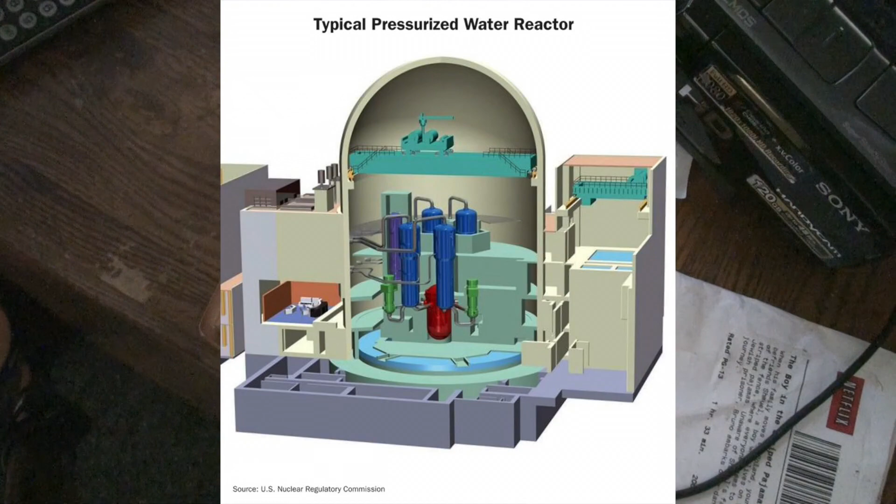So thank you for your willingness to come here to provide this to the technical staff at headquarters. Thanks, Louise. I'll turn it over to OPPD for their presentation. Good afternoon, and thank you for the opportunity to discuss the Fort Calhoun Station containment internal structure with the NRC and the public. I'm Bruce Rash, the recovery director for Fort Calhoun Station, responsible for the issues associated with the recovery of the Fort Calhoun Station. Jerry Simpkins, manager of licensing. Brian Davis will be facilitating for us—he's the recovery engineering director and responsible for this project. Bernie Van Sant is the project engineering lead. Tom Daly is the containment internal structure project manager.

Russ Plaskey is the civil structural engineer for the station. Additionally, we have hired several leading industry engineering firms to support the containment internal structure work. Stevenson and Associates has developed the finite element model for the containment internal structure, developed conceptual designs to address issues, and supporting analytical work for the operability evaluation.

Again, I'd like to introduce Dr. Sming Singh from Stevenson, Mike Allison, Doug Seymour, and Automated Engineering Services Corporation developed a GOTHIC model for the pipe break pressure loads, which are used as inputs to the finite element model. From AES, we have Eric Halverson and Andrew Carmine.

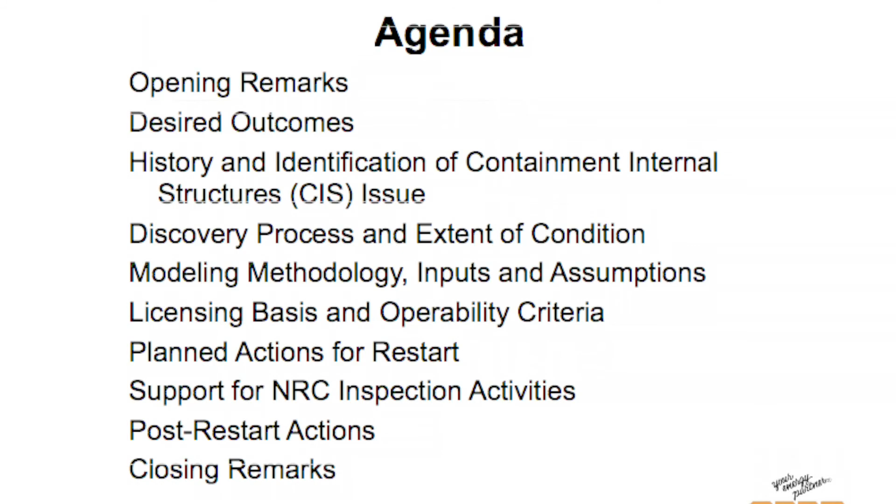Okay, let's go to slide 5. First, we understand the importance of resolving this issue, and we want safety to be paramount in our path forward. So we are committed to the safe restart of Fort Calhoun. The topic that we're presenting today is the containment internal structure. It's the structure inside the containment shell that supports equipment and systems. It does not involve the containment shell or pressure boundary.

Current calculations show that the internal structures are non-conforming but operable for outage conditions, and we continue to refine and evaluate the online cases. OPPD is determined to establish the licensing basis safety margins for the containment internal structure, and we're dedicated to support the NRC inspection activities for operability for restart. Brian Davis will detail proposed schedule and future interactions and ensure full access to all the information that the NRC needs to inspect, and he will discuss opportunities to go to our vendors, facilities, and to the site to support whatever inspection activities deemed necessary by the NRC to support safe restart installation.

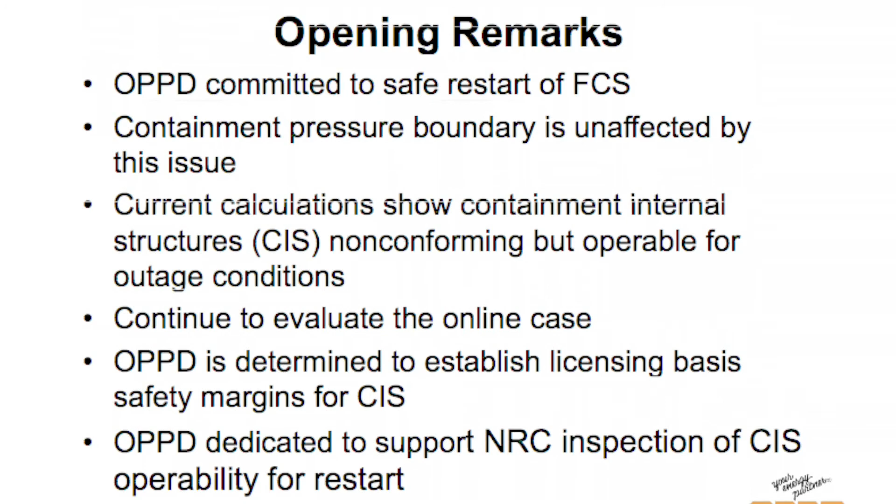Slide 6. Today we have 3 primary desired outcomes. One is that the NRC is provided a full understanding and has an opportunity to provide feedback to OPPD on the containment internal structure operability criteria, that the NRC understands our path forward on the resolution of the containment internal structure issue, and that we're providing the NRC with a solid foundation on the problem identification, scoping, and resolution to support inspection planning and execution by the NRC.

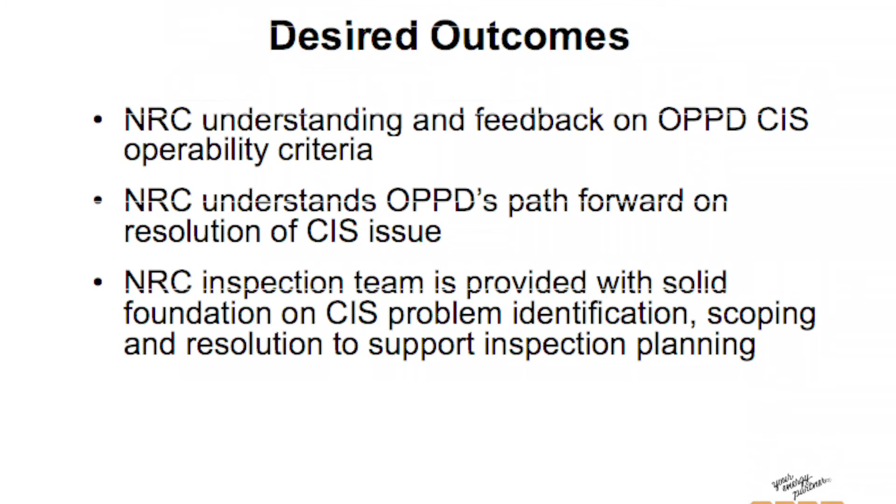Now I'd like to introduce Brian Davis. Brian is the Recovery Engineering Director who's responsible for the Containment Internal Structure Project. As I said earlier, he will be moderating the presentation for us today. And with that being said, I'll turn it over to Brian.

Good afternoon, I'm Brian Davis. As Bruce said, feel free at any point in time in the presentation to ask questions. We'll start off the presentation with Bernie Van Zant, our Containment Internal Structures Project Engineering Lead. Bernie will step through Containment Internal Structures background from initial design through self-identification of the current issue, starting on slide 8. Bernie? Thanks, Brian. Good afternoon, Bernie Van Zant. My slide 8, I'd like to go through.

The first thing I'd like to cover is give everybody a clear picture of what structures we're talking about. The containment has essentially three major structures: the containment dome and shell, which is the pressure boundary portion of the containment; containment subcompartments that house the steam generators, the reactor coolant pumps, and the reactor itself; and finally the containment internal structures, a multi-level structure that supports plant equipment inside containment. The key point is that this does not involve the containment pressure boundaries. The structure is separate from both the containment structure and pressure boundary and the reactor and steam generator subcompartments.

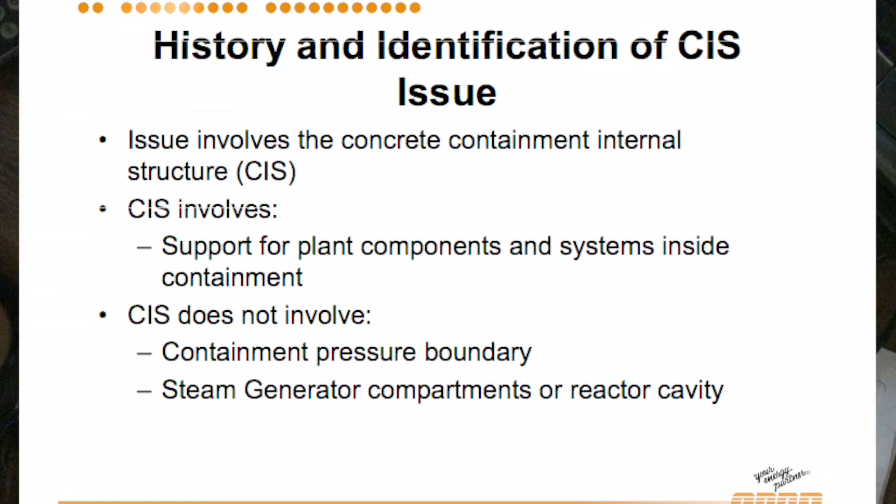Going on to slide 9, this drawing shows the plant elevation at the 1013 level for the reactor building, containment building. You can see on the slide a grayed out area with the subcompartments that house the steam generators, the reactor coolant pumps, as well as the reactor vessel, and then outside of that...

Looks like we got a difference in the slide deck on that. Okay, the presentation. Do we have enough copies for everybody? I'm sorry.

The beams you see here, dashed lines, represent beams associated with the containment internal structure. As you can see, the containment shell and dome is not attached to these. They're supported by internal columns separate from the shell and the dome.

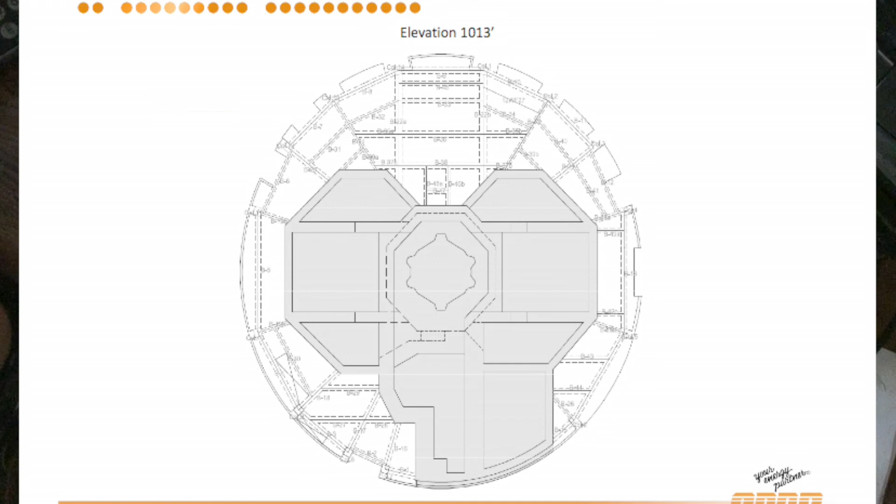What I'm talking about is the pressure boundary for the containment itself. It contains Class components like main steam line, main feedwater, safety injection lines that are safety related. I think I was reacting to the opening remark where you said pressure boundary and didn't give it context, but okay, thank you. Thanks for the question.

Okay, going on to slide 10, let's talk about the original analysis we looked at when this issue arose. The original analysis was a hand calculation for this structure, done in accordance with the American Concrete Institute's ACI 318-1963 code, using the load combinations identified in USAR section 5.11.

That was what was submitted to the commission at the time of licensing the station and was accepted. Since that time, we haven't done any major modifications to the structure that would have required us to go back and review these calcs and update them, which would have given us an opportunity to identify these issues.

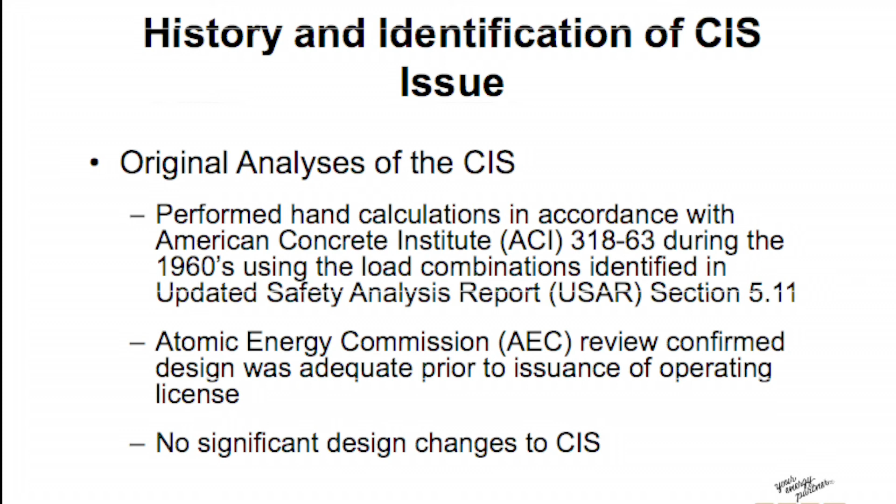Going on to slide 11, the issue was discovered while we were doing an analysis for extended power uprate, or EPU. We were doing reviews of the system and identified that the temperatures of the piping for the component cooling water system reached higher temperatures during EPU conditions than during current operation. So we had to go back and look at the piping analysis for the component cooling water system, and we identified increased loads on supports and on the containment air coolers.

The containment air coolers are situated on top of the 1060 elevation of the containment internal structure. When we applied the loads to the structure, we went back and looked at the original calc, assuming we'd have no problem justifying these minor changes in load. What we found is that the loads on beams 59 and 58 couldn't carry the loads they were designed for, let alone the new loads from the extended power uprate. At that point, we initiated an extent of condition investigation to look at other areas that may have similar problems with this internal structure.

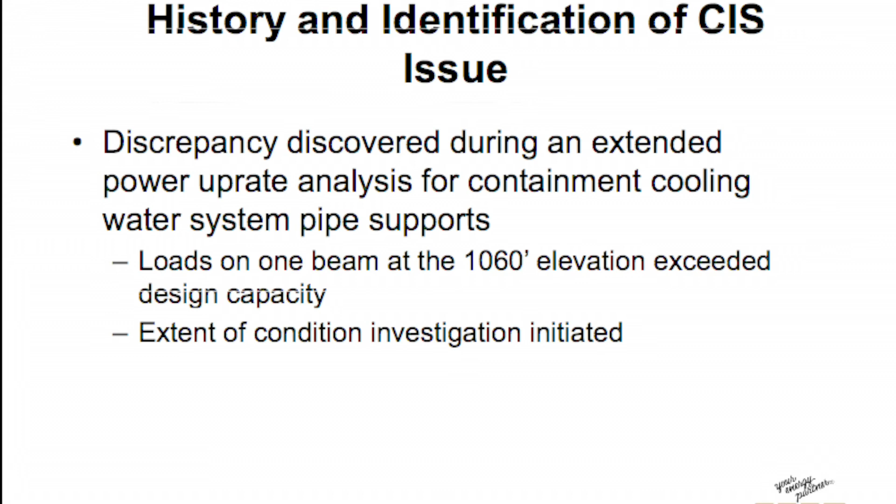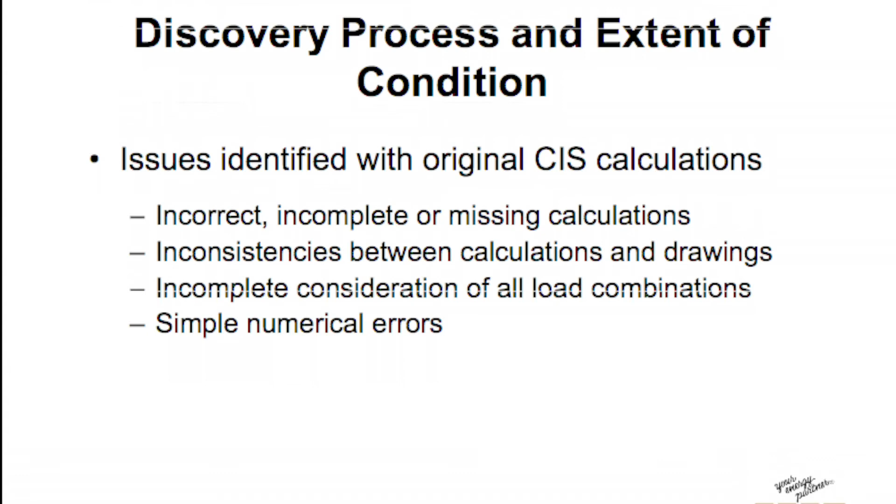As part of our extent of condition investigation, we started with B59 and B103. B103 was in the steam generator compartment, and B59, as I said, was under the containment air cooler on the 1060 elevation. B59 did not meet its working stress requirements, while B103 did pass.

Given the fact that there's a companion beam to B59, which is on the opposite side of the containment air cooler, that beam sees the same loads and has the same stresses applied, and it also does not meet the working stress. Okay, another question.

If I could interject, please. You said B103 is in your steam generator compartment. You have replaced your steam generator, is that correct? Yes. And during that replacement, this would assume that you would have looked at the beam supporting the new generators. Yes. And this discrepancy was missed at that time? Not a discrepancy, but this beam passed. Oh, beam 103 passed. Passed. Oh, okay, I'm sorry.

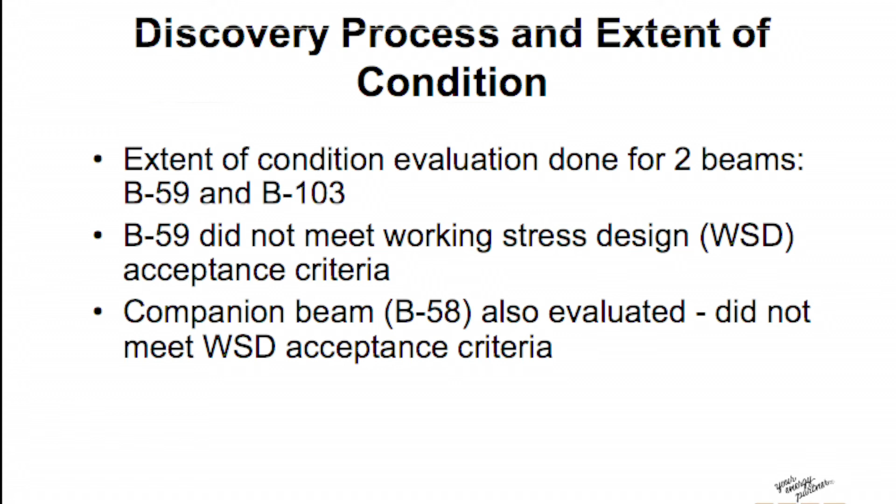On to slide 14. We have the failure of beam 59 and its companion beam 58. We expanded the extent of condition and did a smart sample of 9 heavily loaded beams in the containment structure, along with the column. As we went through those individual beam assessments, we stopped after we got through the first 6 beams because none of them passed. Based on that, we determined that the stepwise approach of going through these one at a time wasn't warranted.

We determined that we needed to go back and reconstitute the entire design of the containment internal structure using a three-dimensional, state-of-the-art structural analysis.

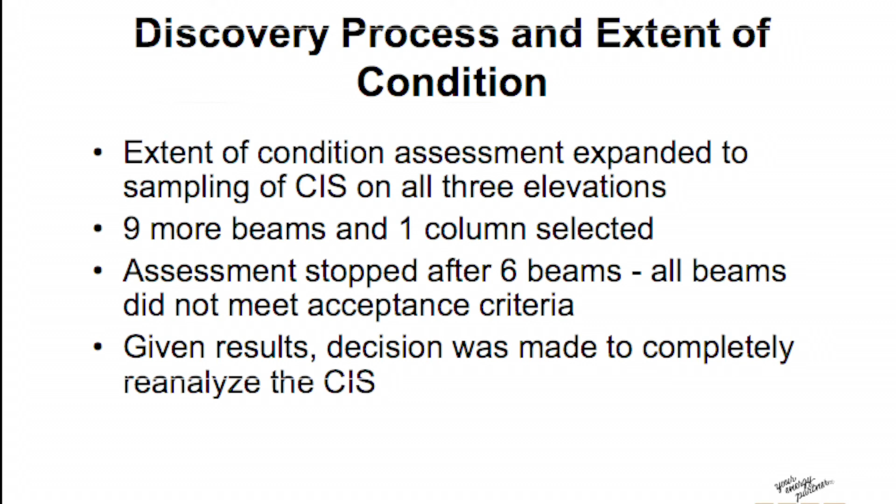Next, Russ Plackey, Station Structural Design Engineer, will provide an overview of the modeling methodology used to perform the reanalysis of the containment internal structures, including measures taken to ensure the accuracy of the model.

We'll be starting on slide 16. Good afternoon, I'm Russ Plackey, design engineer for Fort Calhoun Station. First, I described to you what the CIS is, the function of the CIS, and also how the design discrepancy associated with the CIS was identified. What I'm going to talk about is the modeling methodology, inputs, and assumptions used for the redesign of the internal structure.

A three-dimensional model of the CIS was created using GTSTRUDL, the state-of-the-art, industry-recognized finite element analysis software used to determine loads on the structural members. This method of analysis more accurately reflects the loading on the structure as it analyzes the structure as a unit, versus the original design, which analyzes each member individually and does not account for member interaction.

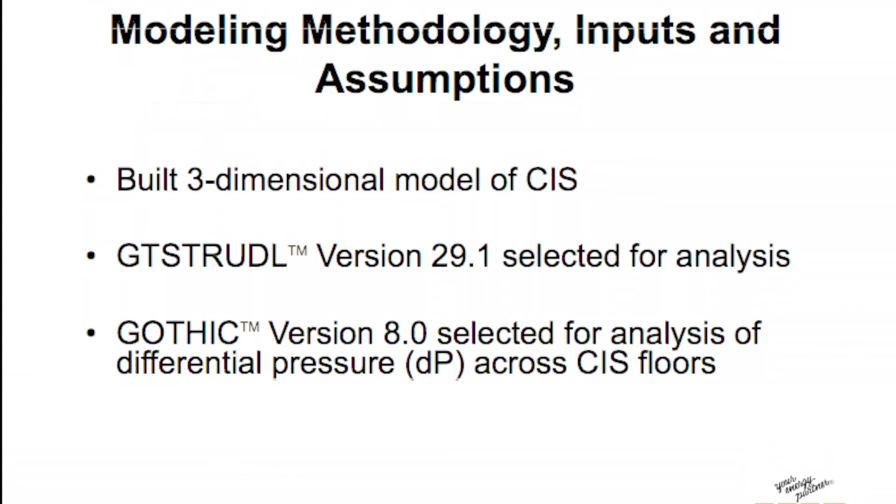On slide 17, the analysis that was performed was very rigorous. All design loads, inputs, and assumptions were thoroughly reviewed by third-party and independent reviewers. In addition, challenge boards, comprised of members of the review team, conducted rigorous reviews of the model and all the design inputs to ensure that all the critical parameters of the design were addressed. In addition to that, hundreds of hours were spent conducting...

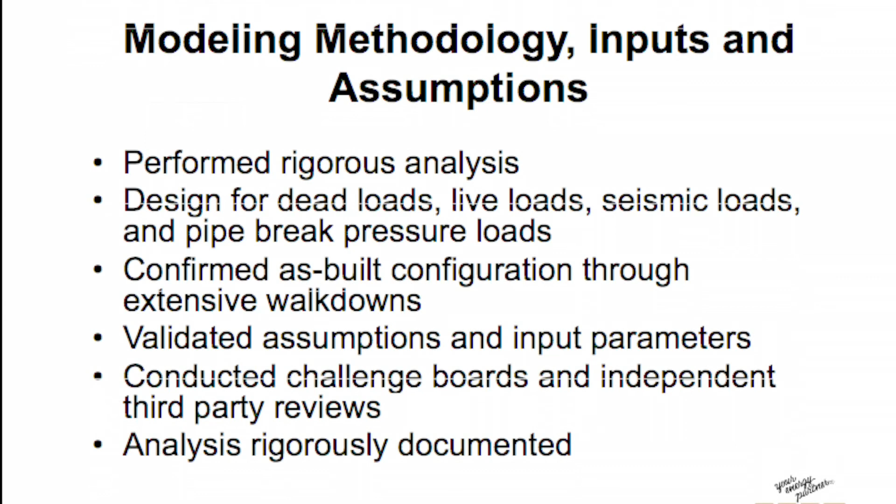The model of the CIS is a finite element frame model constructed using the GTSTRUDL modeling software. The loads evaluated within the model include dead loads, which include the weight of the structure, equipment loads, commodity loads, anything that's permanently fixed. Live loads, which are transient loads associated with maintenance. Primarily seismic loads, including both the operating basis earthquake and the maximum hypothetical earthquake, and pipe break pressure loads.

The differential pressure is determined by input from the pressure model, which will be discussed. And the model evaluates seismic loads by using the seismic ground response spectrum.

That's a good question. Your USAR indicated that some of the operating floors were missile shields. Do you consider missile load on the operating floor in your evaluation?

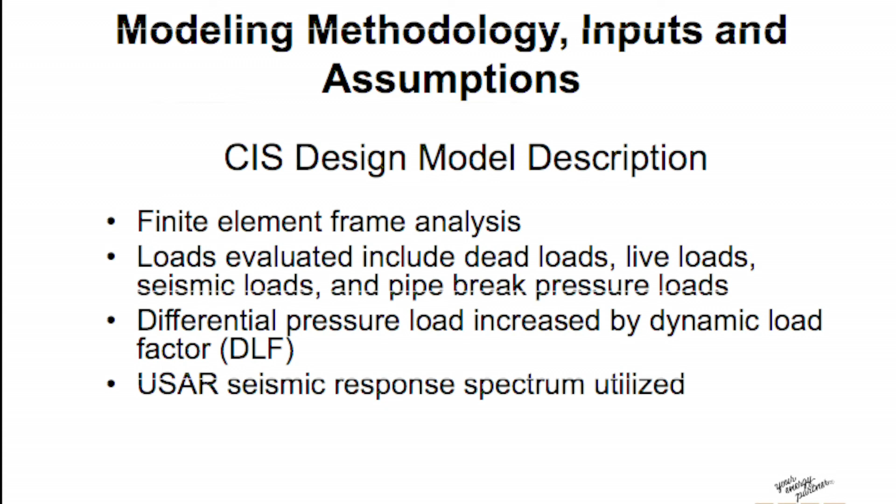The key difference is the USAR considers the CIS as virtually rigid, whereas our design model considers the fully justified flexibility of every beam and column, taking account of additional flexibility that a modern design would expect to occur during a maximum hypothetical earthquake. Did the analysis in a vertical direction? Yes, and we applied state-of-the-art principles all the way. This approach does cause the model to show a higher amount of stress in the beams and columns under seismic loading than would be the case if the model incorporated the USAR principle of vertical rigidity.

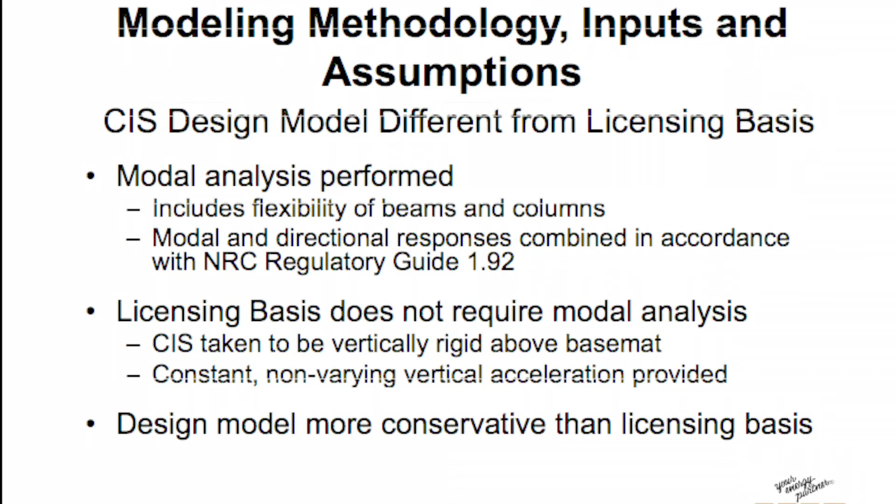Slide 20. This flowchart is an overview of the approach we've taken to the CIS reanalysis. We first performed a review of the design basis and licensing basis in order to make an informed decision and provide the owner with options regarding methodology for the redesign project. We then performed numerous walkdowns of the CIS to help establish the precise as-built configuration, ensuring the design model is an accurate representation in terms of loads and geometry.

Due to discrepancies found between some of the older calculations relating to the CIS and the Fort Calhoun engineering drawings, it was necessary to firmly establish the properties of the beams and columns to establish the structural starting point. It was concluded that although some of the old calculations on record didn't match the as-built condition, this was a past document control issue rather than a design issue, and the Fort Calhoun engineering drawings are an accurate representation of the as-built condition as they match the actual construction drawings used to build the plant to an excellent degree.

Two detailed reports were prepared to address loads, one for discrete equipment loads and one for distributed commodities, which takes input from the walk-down report.

I got a question. What's a model, the big model? We're talking about the frame model, not the simplified version, but the overall frame model. Can you give me the size? So he created the size of the model and discounted for the flexibility of the model? Yes, sir.

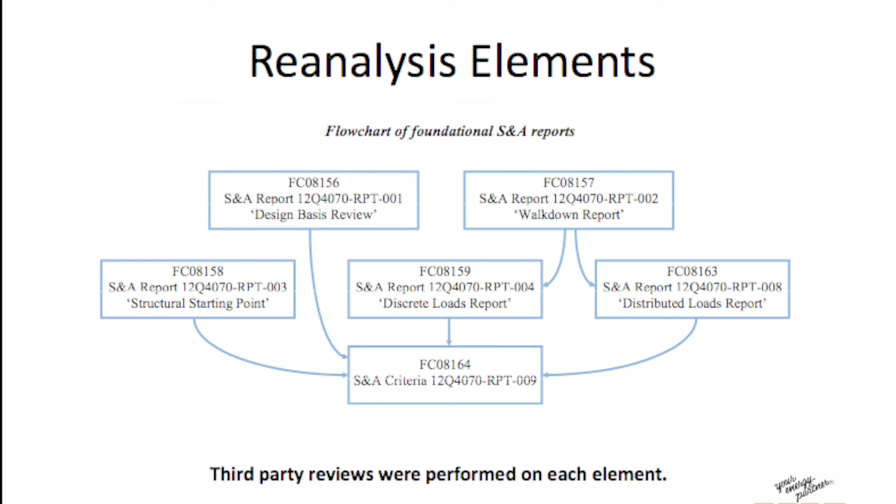If there are no further questions on this slide, this is slide 22, a visual representation of the containment internal structure finite element model.

The model consists of 167 beams, girders, and column sections. Each column is given a full set of code checks at 2 locations, and each beam is given a full set of code checks at 5 locations, for both working stress design and no loss of function design.

All of those for 9 different load combinations. So a total of more than 13,000 checks are performed on the structure.

The total number of beams and columns, 167, that's total. When you say code check, are you talking about GTSTRUDL or code check outside?

Outside, external. Let me ask you something—I'm hearing a lot about columns and beams, what about the slab?

Slabs have been evaluated, and yes, they pass both working stress and ultimate strength checks. Is the slab in this model? That is not in the model.

So you have purely beam elements here—there is no finite element like shell or plate. That's exactly right.

Before we move forward to the GOTHIC model discussion, I wanted to take a minute to talk about third-party reviews. This is where third-party reviews come into effect, or started coming into effect.

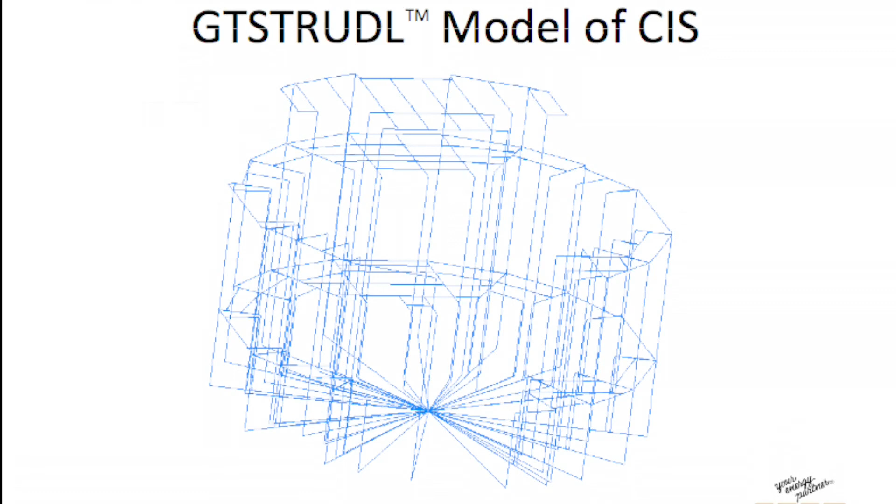I would like to tell you about the analysis. I can't hear anything. Why is there music playing? What the hell? Whose music is that? Oh, this went to hell.

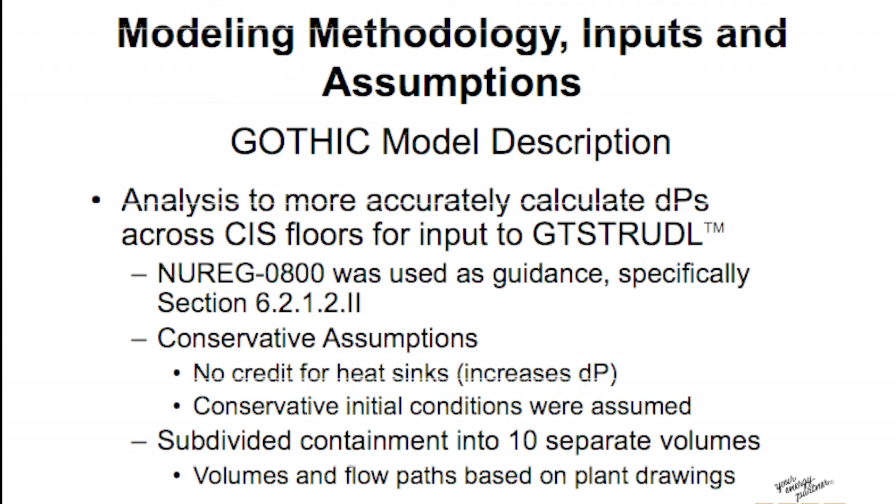Correct, those are the mass and energy releases. We use the mass and energy releases provided by OPPD from their design analysis, and we input them into the Gothic model.

Any additional questions or follow-up? That is correct, yes. Volume 9, as described here, is just the volume between the 1028 elevation and 1046, and 10 is just between the 1046 and 1056 elevations. We broke them down again just to be as accurate as we thought necessary to get the floor DPs that Stevenson Associates needed.

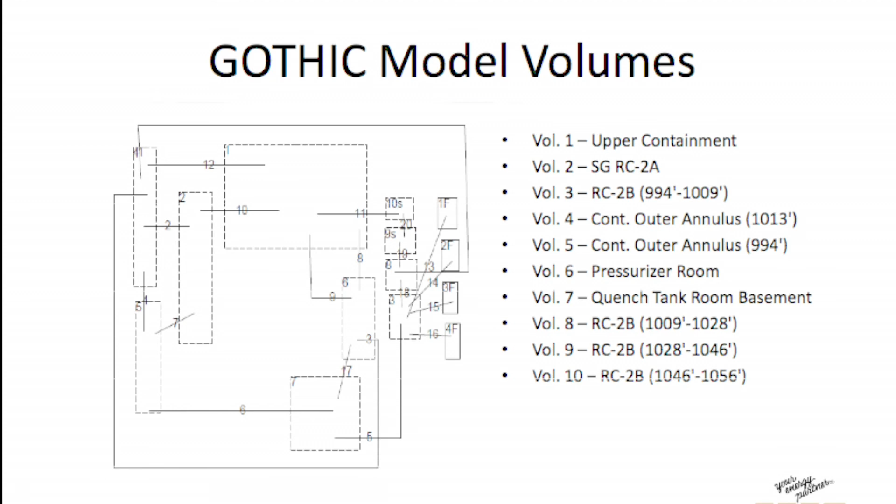Are there other questions for Andrew? These are time history data. You give that to... That is correct. On-time history, or creating... I was going to discuss part of that later, but no — we'll take that time history and develop a dynamic load factor. In fact, we'll develop a spectrum of dynamic load factors based on the natural frequency of the structure, and we'll take the peak of that, which will be applied as a dynamic load factor.

On slide 27, Russ will provide an overview of the operability evaluation development and current status. Russ, like the top model...

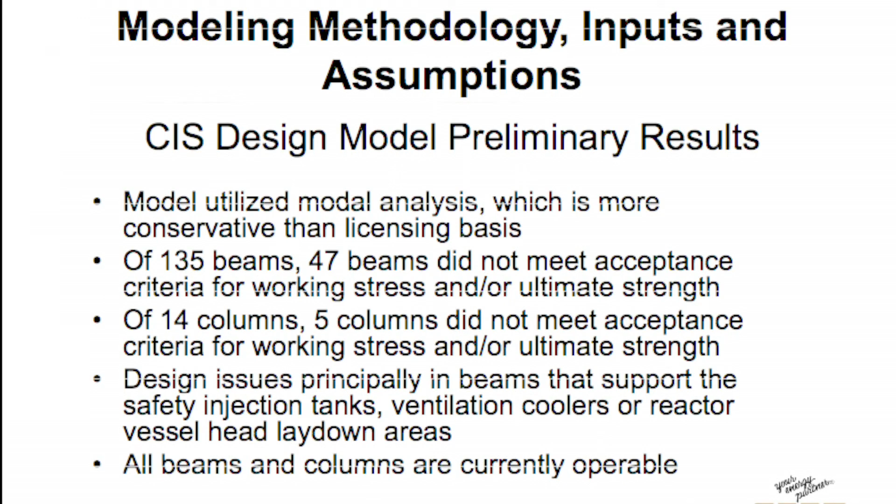Could you define that? I struggle with this—I think I'm hearing you're outside your original design basis. And yet, is this a non-conforming but operable condition, or is this operable?

It's non-conforming in that it does not meet both the working stress and ultimate strength design. But from the original licensing basis, right? Correct. Okay, this is not open—it requires both, and they'll be pointed out later in the presentation as well.

I'd like to ask the question more clearly—can you define the term operable that you're using? I think we have a couple of issues here.

One is the mode of applicability doesn't even apply right now—no fuel loaded. But I would call it non-operable if we have fuel loaded. Right now, all the fuel is... What would be the term you'd use if you're in Mode 1? We're going to talk about where we're at for the operating case. Okay, we will. All right, I'll wait. Thank you.

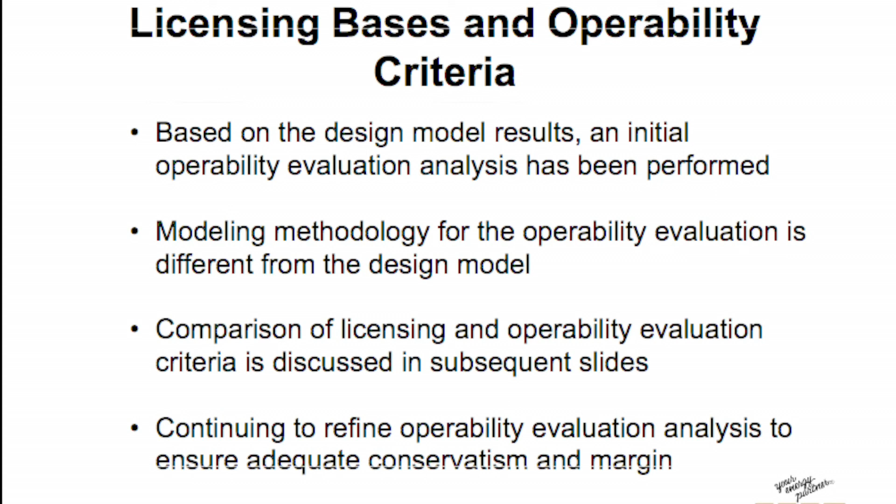The design purpose for the internal structure for the licensing basis is to maintain the functional integrity of the structure with design basis margins under the most extreme load conditions, such as the safe shutdown earthquake. For operability, however, operability criteria use the same code, ACI 318-63.

I go back and I can appreciate you're doing a lot of modeling and evaluations with the modern code. I'm still looking at it and going, okay, now what does this mean for the FSAR, and what has to change in your design basis? So you can help me here with where you're going this year. They're trying to satisfy the operability piece, but I'm looking at it and saying I'm not seeing how I'm not getting an amendment out of this.

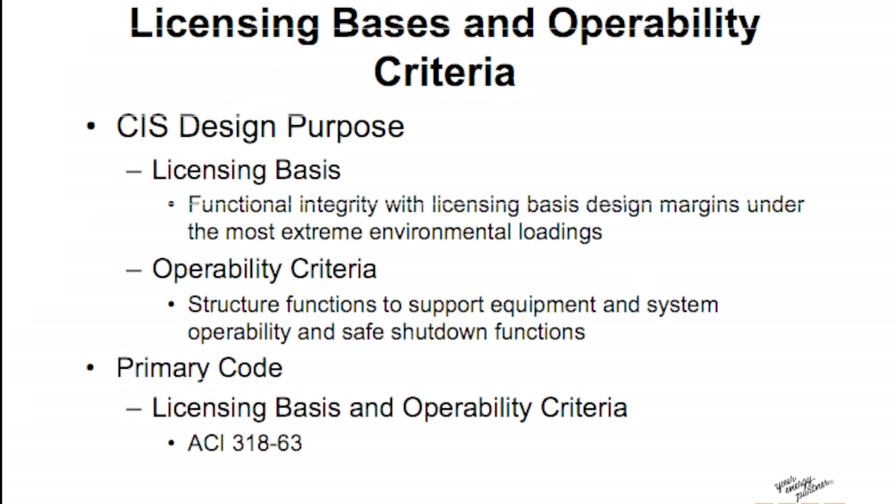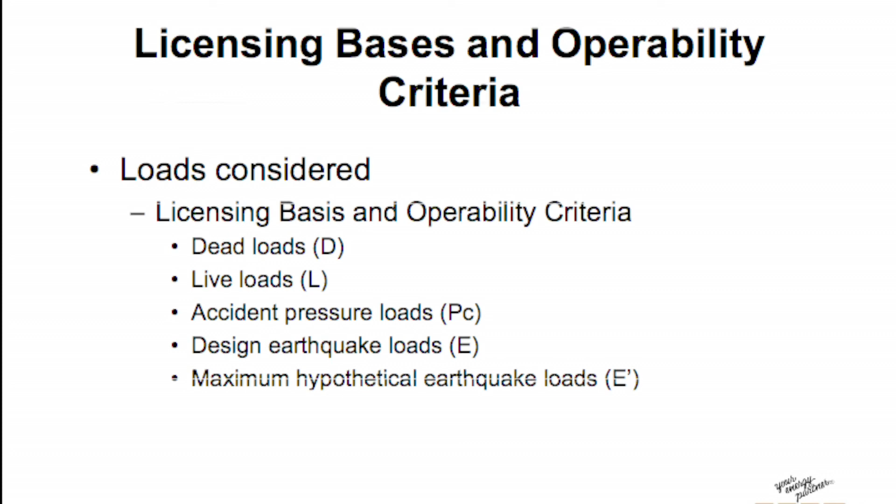Our 5059s are targeted at the modification loads, the accident pressure, and which is the design basis earthquake and maximum hypothetical earthquake.

And then on to slide 31, the licensing basis considers both working stress and the no loss of function load combination, whereas the operability criteria only looks at the no loss of function load conditions, and they have the same load combinations for the operability as what is used for the license basis no loss of function.

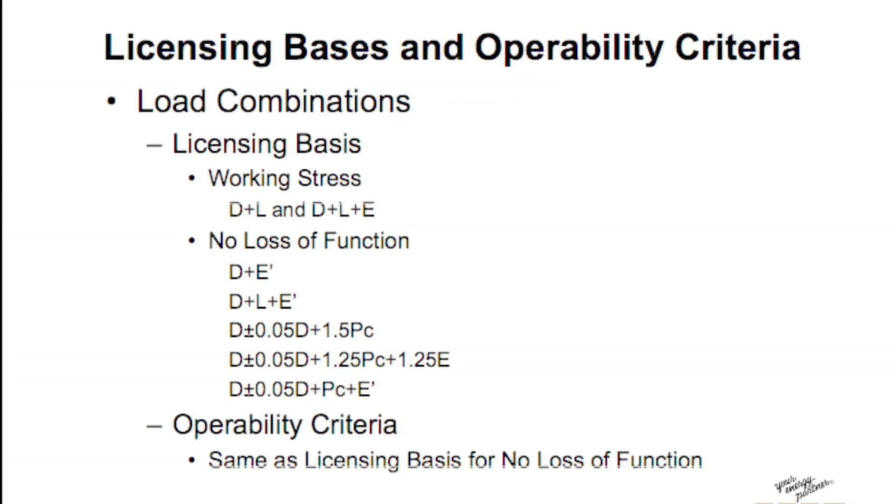Other questions? Okay. Doug Seymour will now provide additional details on operability criteria, including conservatisms that we are maintaining in our operability evaluation process, and we'll share operability evaluation preliminary results. We'll continue on slide 33. Thanks, Mark. So Russ just gave you some detail about the agreement we have between the licensing basis criteria and the operability criteria, and I'll now discuss that in detail. Russ gave you an overview there.

The first example is ductility, where there's total agreement. Ductility is often used to show operability of concrete structures as permitted by industry standard building codes, nuclear building codes such as ASCE 43-05. However, ductility can't be used for design, so we've conservatively neglected that in our criteria.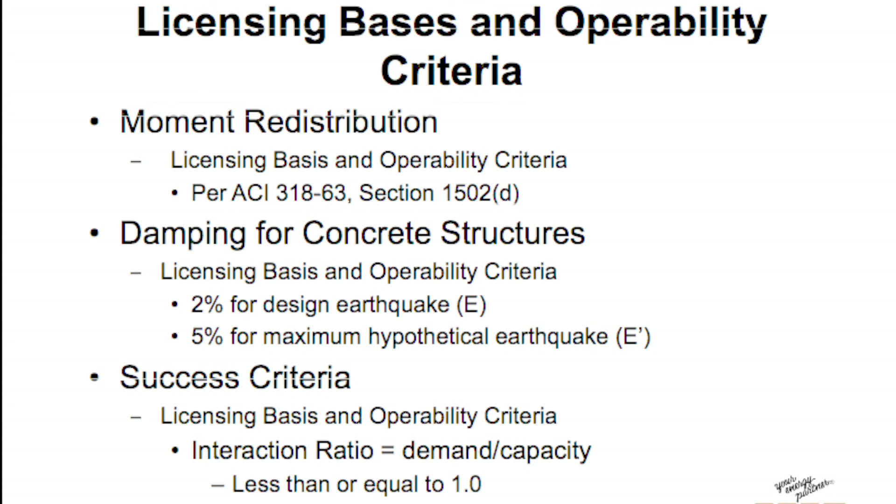Okay, moving on to slide 35. To summarize, the criteria we use for non-operability are identical to those specified by the staff, except for operability where we consider only the no-loss-of-function design methodology. For design, we use the 4,000 psi specified concrete strength from the design basis rather than the actual 28-day test strength as allowed by code 318.63, which we also use to determine operability.

Can I ask you a question? Yes. Dead load and live load - notice that your working stress design is obviously based on dead load and live load. When you analyze dead load and live load, what are the interactions? I'm trying to understand which load is giving you the problem, because right now you're saying you're not going to do working stress design.

Right, exactly. As you know, working stress design is about approximately twice as conservative as ultimate strength in terms of the principles, and it also gives you 33% capacity increase under seismic conditions. Under the 318.63 code, it permits an additional 30%, and this was used in the original design back in the 60s.

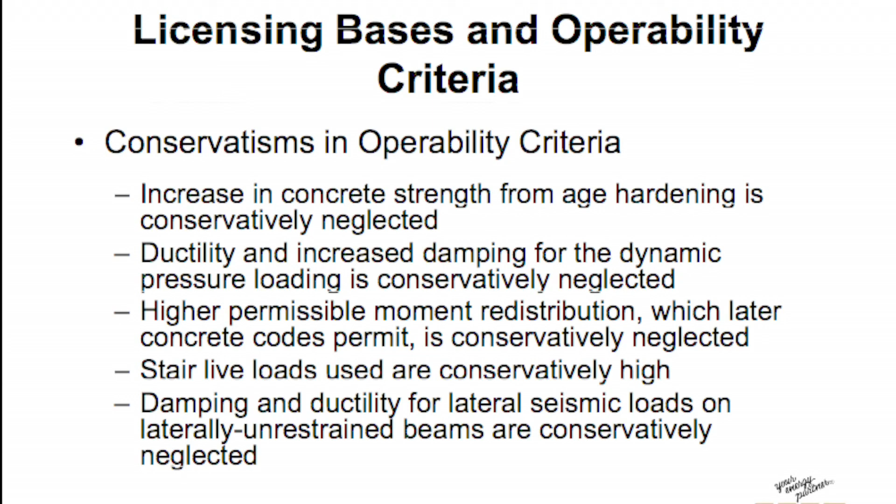Questions for Doug? I think I have one more slide.

The findings of the operability evaluation are that for the current outage condition, all of the beams and columns are found to be operable. They meet the no loss of function acceptance criteria for operability.

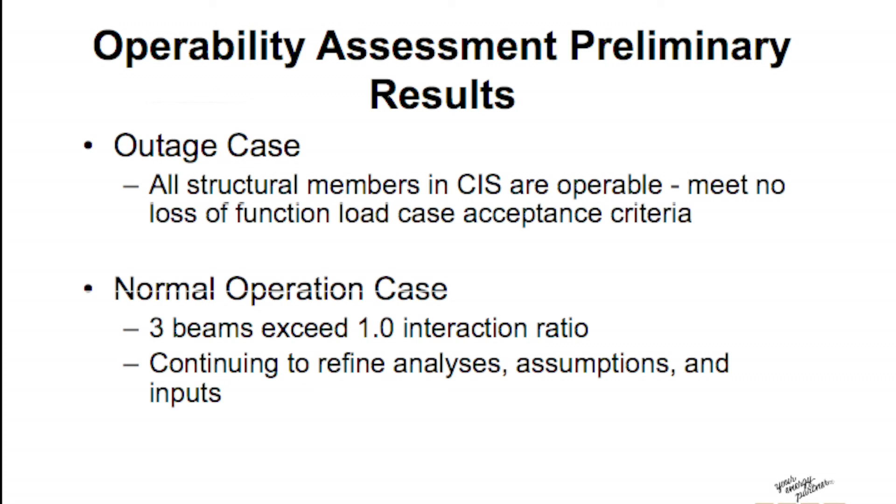So does that mean prior to restart you're looking at either fine-tuning this analysis or making some kind of modification? Absolutely, one of them. I'll discuss that in the upcoming section, but yes, that's clearly the direction.

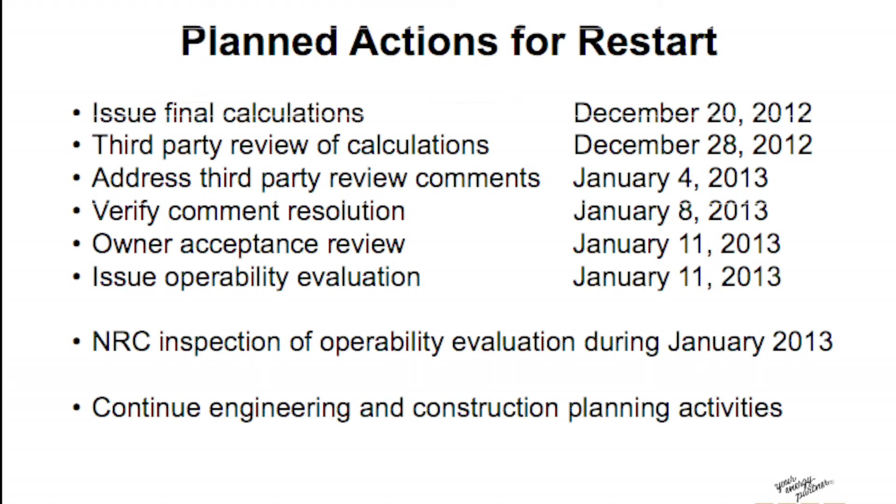The process is to complete draft final operability calculations on December 20th. From there, we'll build our ongoing third-party reviews and owner's acceptance reviews, which will lead to approval of the operability evaluation on January 11th. This supports inspection activities in January. In parallel with these efforts, we'll continue engineering and construction planning.

The operability evaluation - and you're going to do all this in 3 or 4 weeks now - is meant to demonstrate operability, that term I'm using loosely, for power plant operation in Mode 1. Correct, and shutdown - obviously, it's operable in mode 1, it better be operable when you're shut down. The reverse may not be true. Okay.

So slide 40. Based on our project timeline, we propose using the week of January 7th to present issue background documentation and conduct on-site familiarization walkdowns as desired at the Fort Calhoun Station.

We're prepared on the week of January 14th to support model reviews at Stevenson and Associates in Boston, offering to cover both GT Strudel and GOTHIC models in Boston with OPPD, Stevenson Associates, and Automated Engineering Services supporting those inspections if that's most convenient to review at that location.

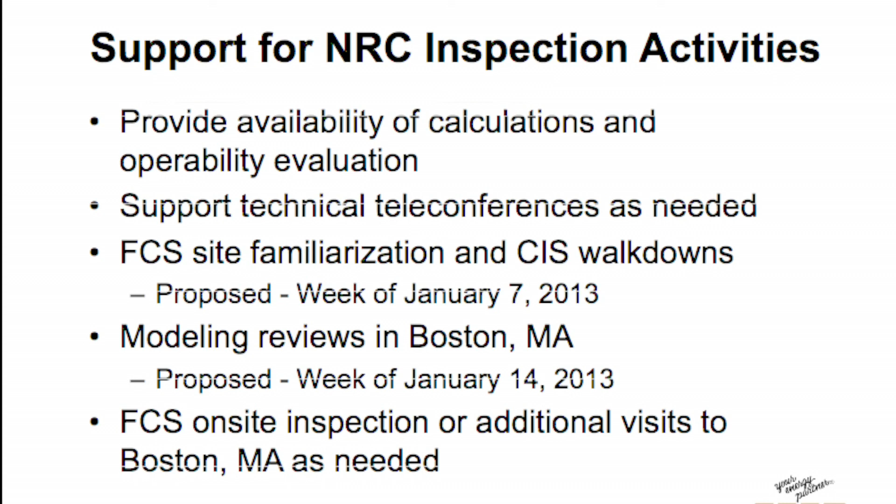And we're pretty far through the analytical work. We have a couple of things, as per what Brian presented on the slide, that we're still working - I think you got the last bullet there that captured that. Okay, good, let's go on.

Slide 41. Yes, Chris. B22A, B22B, and B23 all on elevation 1013. And all the columns are acceptable?

So slide 41 details our path forward after restart. We'll continue with our current design efforts using additional time to optimize our modification design. Understanding that, as Bernie discussed, adding columns will change the free air volume inside containment, we want to be very sensitive to that and carefully evaluate the impacts of the reduction in volume as well as other interferences in general.

So I'm clear - you haven't identified any columns that you need to replace or modify yet before you make your operability call under some degraded but operable definition. However, there may be some that are required to restore the licensing basis. That's correct - so not need an amendment, it's up in the air. That's correct, all under evaluation. I think I understand it, okay. In operability space, there aren't even any that are close under the operability criteria.

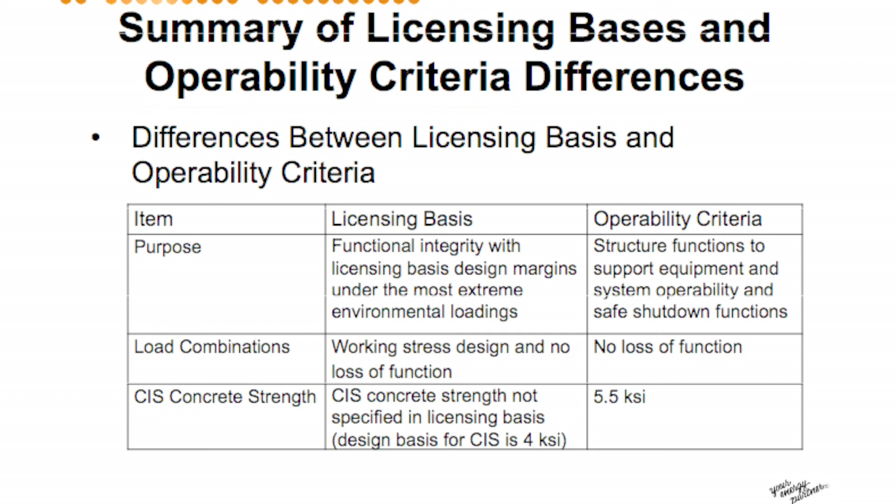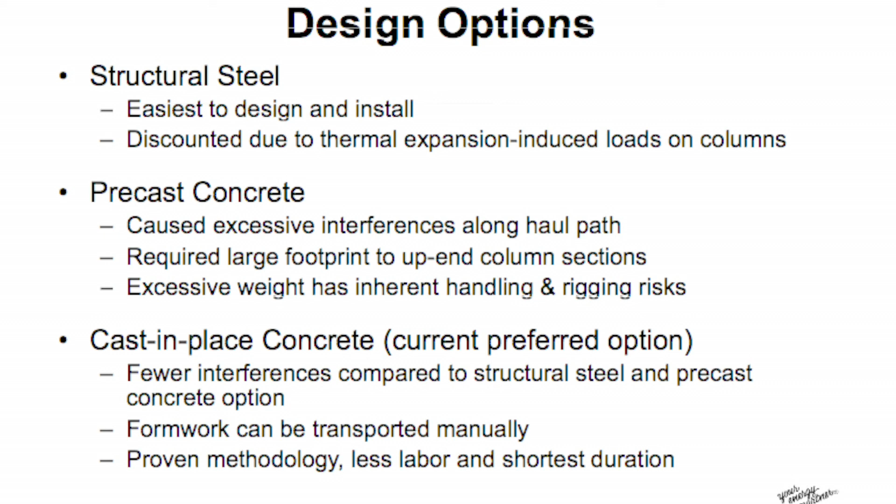Are these in line with the other 2 at 1013? They have to be in line. That's correct, I was going to say that. I want to find out.

Let's address beam 22, 22A and B, and 23 — or next one. Okay.

Correct me if I'm wrong, 22 and 23 are on the 1013 level. I'm sorry, right there. Yes, I will address those. Got a question on 1013, but please continue. I'll ask later.

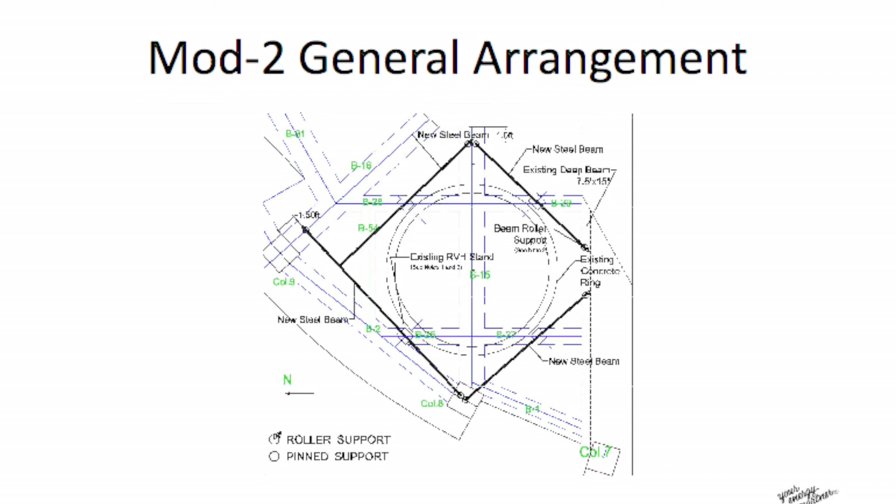Or did you? No, preload. The connection between the columns and the beam — I guess that's the point, right? Let's see what's happening. All right.

There should be more connection. I'm trying to develop the rebar into the beam. No, we're not doing that, so it's not a moment connection. No, it's not about the connection.

It's supposed to pin it. He's just going to drill and grout. Well, I may be asking a lot, so speak up.

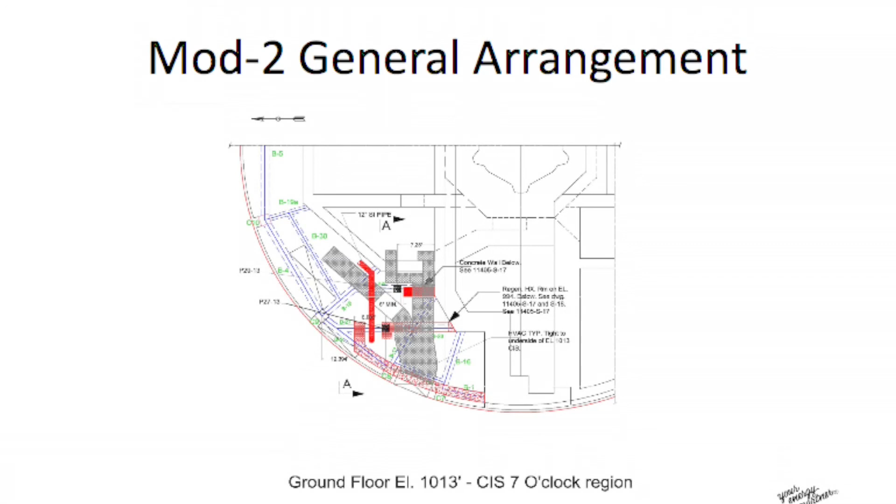So you're attaching the new column, or proposing to attach it, to the fill slab. All the columns that we're putting in—that's not a structural slab. So how is the load path going to go through the liner plate, through the structural slab, and to the pile? I'm kind of confused how that's going to happen. You haven't gotten into that detail yet. That's my feedback.

Taking action on how that load path is going to happen at the liner plate. We'll capture that. I understand. Well...

You've got to consider your entire shaded area, which includes your steam generator cubicles—they're anchored to the slab with couplers. And now you're putting in a new column which is not attached to the structural slab. This entire system has to work together, because laterally your slab is supported by the box structure, and also vertically. So there's an intricacy there.

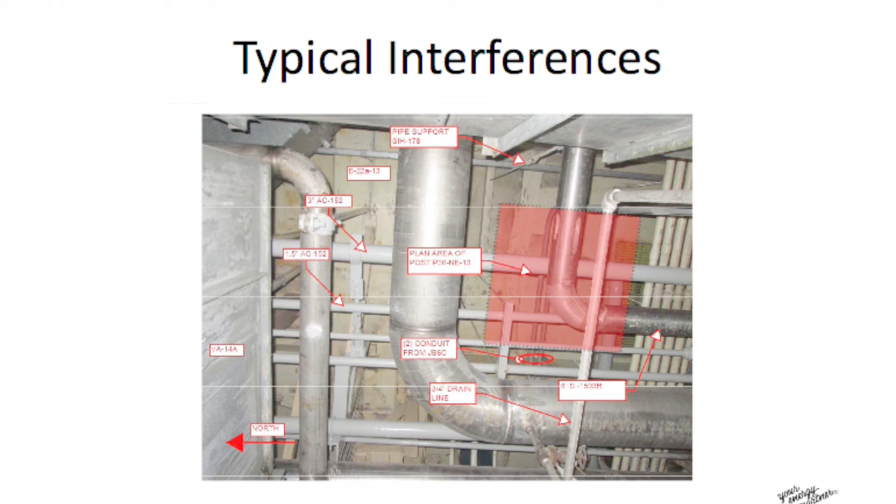While column interferences are a significant challenge, there are other containment analyses that require careful evaluation prior to modification of the containment internal structures. The question earlier on containment peak pressures, and the question on the base mat interaction, further illustrate this point. Bernie Van Zant will describe some of these analyses beginning on slide 55.

Bernie: Yeah, you kind of stole some of my thunder there, but the description Tom showed there involves a lot of field work going on, and we have an equal amount of analytical work that has to back all of that up. First, we have to finalize the structural analysis of the internal structure and detail out the loads on all the beam columns so that S&L can start their analysis and design of the columns. Two key issues there.

One of them, which you brought up, was the interaction with the base mat, and also, as Tom discussed, we have a feature of these beams that we have to allow for—the jacking or preload on these columns. That's going to be a significant design feature that will take some time to work out and make sure we get right.

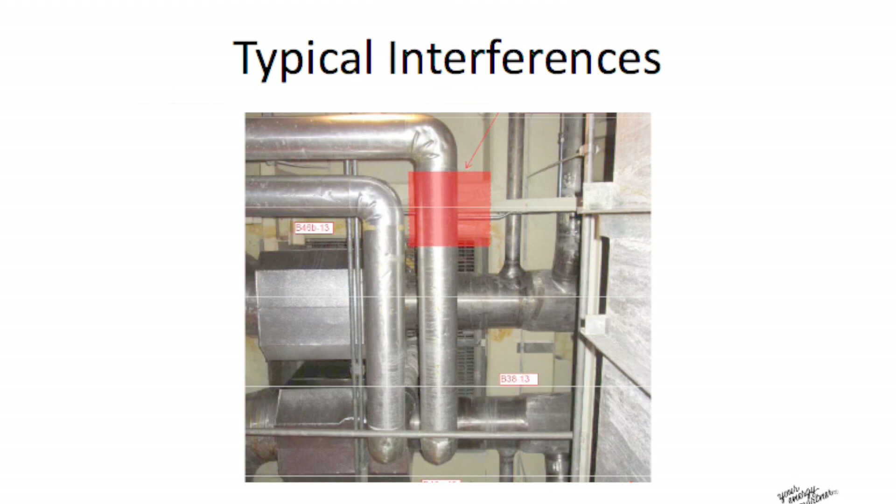Yes, pump strainer blockage, flow of debris back to the pump strainer, and what gets carried around the sump. We have to look at all of that, as well as we're putting more concrete down there. Does that affect the chemistry? We have to go back through and look at all of those.

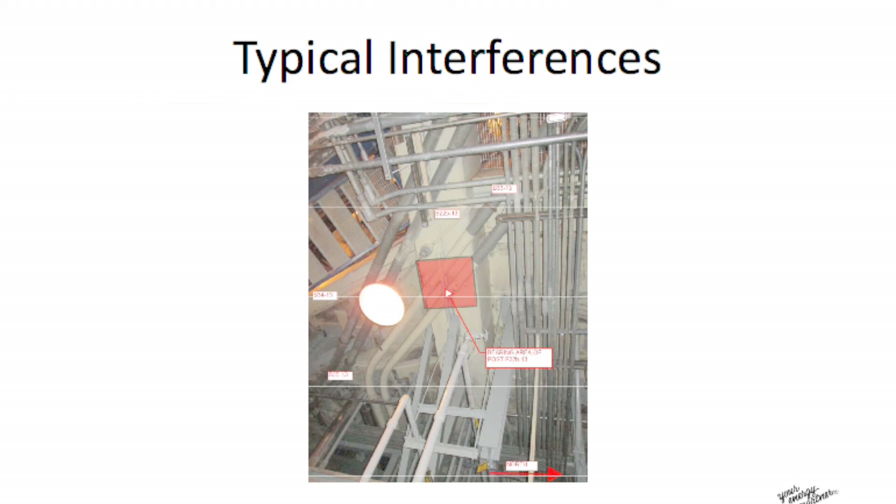What are you looking at? Are you looking at, let's say hypothetically, hypothetically we agree with the OPPD approach, what is your plan for getting everything back to licensing basis status? Next outage after the restart? Our plans are certainly predicated on completeness of safety.

And from a schedule standpoint, I think we're prepared to say it can all fit in one outage. Certainly, if we can fit it with the mobilization and demo price of getting the concrete pumping, just for example, and the labor ready is significant. So what we'd like to be able to do is move as many interference items to the outage so the construction activities can be easier and go through outages.

And the commitments on time frame will come through Lou and company in terms of what the time frame would be for commitments on resolving the issue in total to restore licensing basis. But assure you that we do it in as timely a manner as we can with complete and safe analysis of the plan. I would say one to two, but I'm not ready to make the commitment.

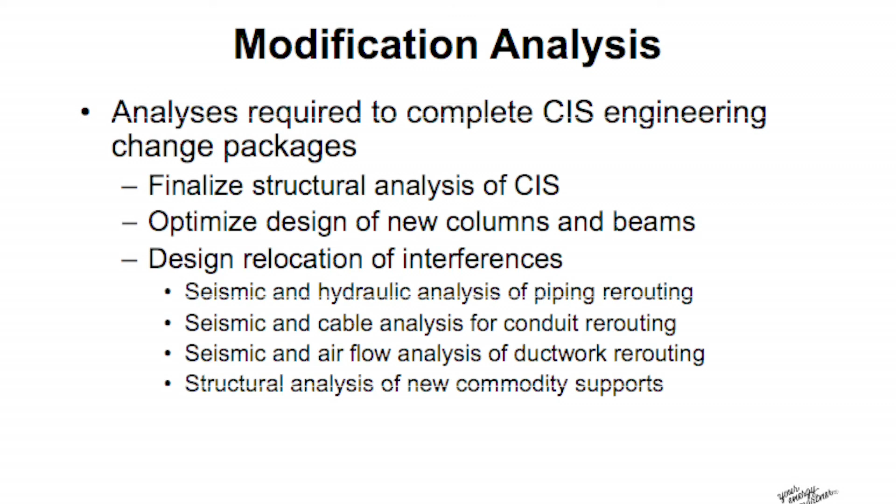Who would have to make the commitment? We understand the restoration of full qualification, commensurate with safety and timeliness. In this case it is complex. We have quite a few issues that when we start changing the design, we have to go reanalyze. If we can show that the current design is safe to operate for a cycle or two while we're finishing all of that analytics, that's what we would like.

Tom talked about the major outage for the steam generator replacement, pressurizer, and reactor head. That took three years of planning and a year to install. We believe this kind of construction is commensurate with that in terms of schedule and complexity. Certainly is.

I do appreciate that, Bruce. I mean, personally, I think we'll have to have more discussions closer to restart, whether it's the commitment process or whatever. But I think the NRC is definitely going to want to have a good understanding of what the intentions are to restore the solutions. We understand.

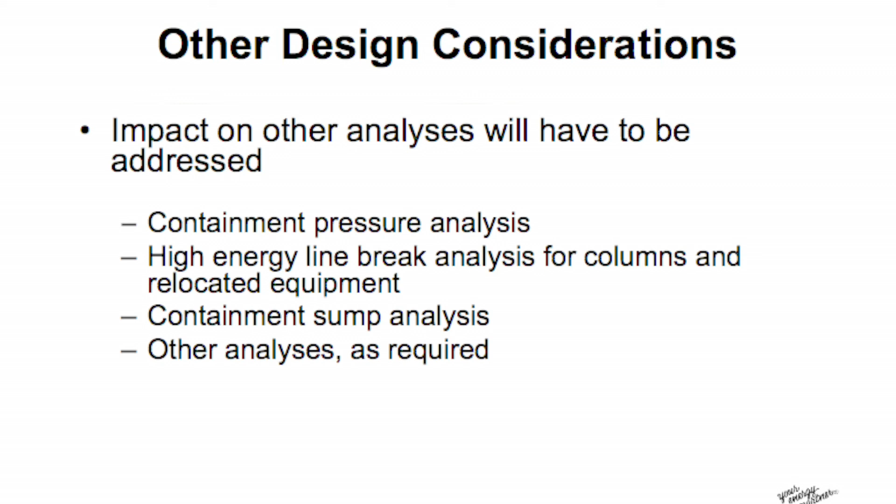So I'll capture the continuing evaluation of the potential for a licensing request, and from Megan's question, make sure we're looking at the walk-down process and feedback on whether there's a walk-down process.

I think, speaking for the staff, in the sessions we've had, some very fruitful and productive meetings from understanding better what your proposal is, what your thought process is in looking at the operability or operable-but-degraded perspective. I think we understand it a lot better as to what your proposal is.

There will obviously be a lot more discussion. We look forward to receiving those and working with our region for the inspection team. The other part too is we'll be taking back the data you talked about in January, as far as availability of both the analysis, and also being able to physically go out and look.

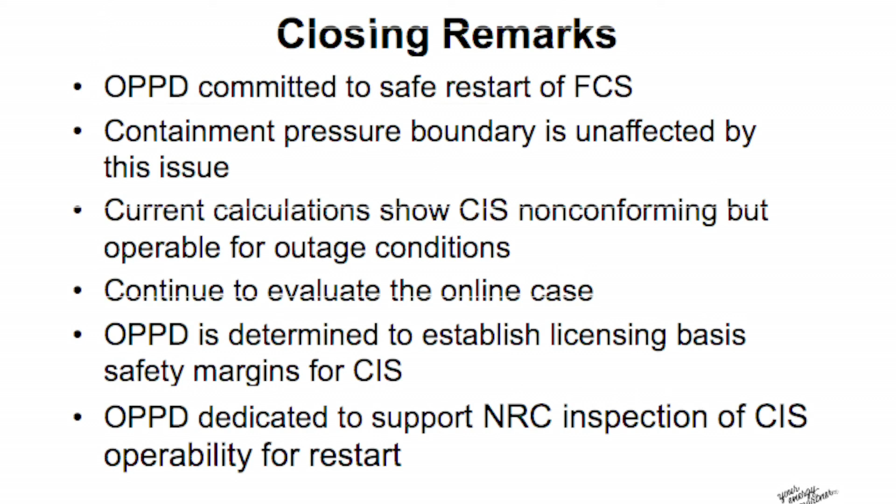Sure. Were these design and structural defects you've been discussing present back in 1973 or 74, whenever Fort Calhoun was first licensed? Yeah, I assume yes, the licensee isn't saying that. He's admitting to that. Okay, and would these defects, or should they have precluded licensing if they had been addressed at that time?

We don't know the answer to that, we would just be speculating. This is Pat Hiland, I'm the director of the Division of Engineering. We would just be speculating. I assume if they were identified at the time, it would have been corrected or justified.

Well, I was hearing some comments about licensing criteria and licensing basis versus operability, which kind of inferred to me that these defects would be something that would have precluded licensing. I can't address all of the discrepancies that have been identified today. As I said, it depends. Some of those may have been able to be justified, and some may have been corrected at the time of the licensing stage.

And years ago, I don't have the answer to that. There was a comment about weight-supporting beams. What are these beams supporting, or what is the weight that's on them?

Now, we don't have the specific mass that's being supported by the beams. The beams are horizontal members that support - I think we heard today there's some tanks, safety injection tanks, that may be supported. There's some ventilation equipment that may be supported by these beams, as well as the stand for the reactor vessel head that may be supported by these beams.